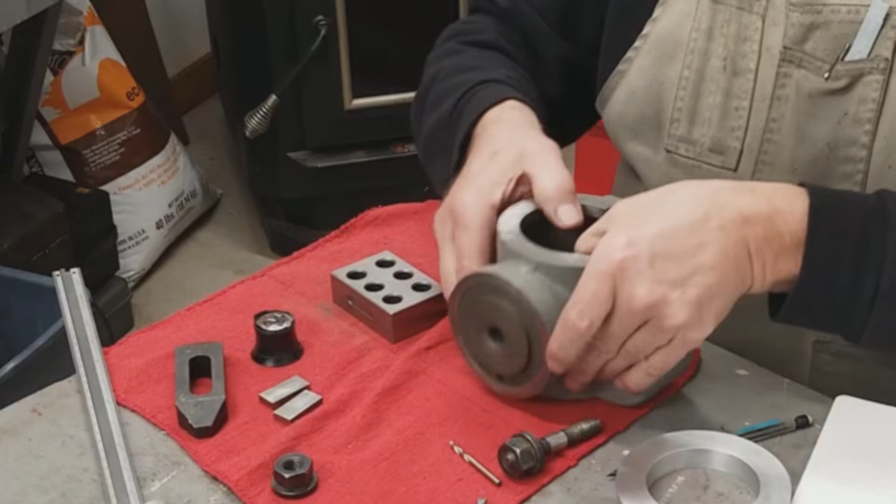The only way I can do that is bolt that on. But this surface here is raised, and I really don't know if this is square with anything. What I'm going to have to do is put a couple of risers, little shims on here to bring the 1,2,3 block out and away from this raised area.

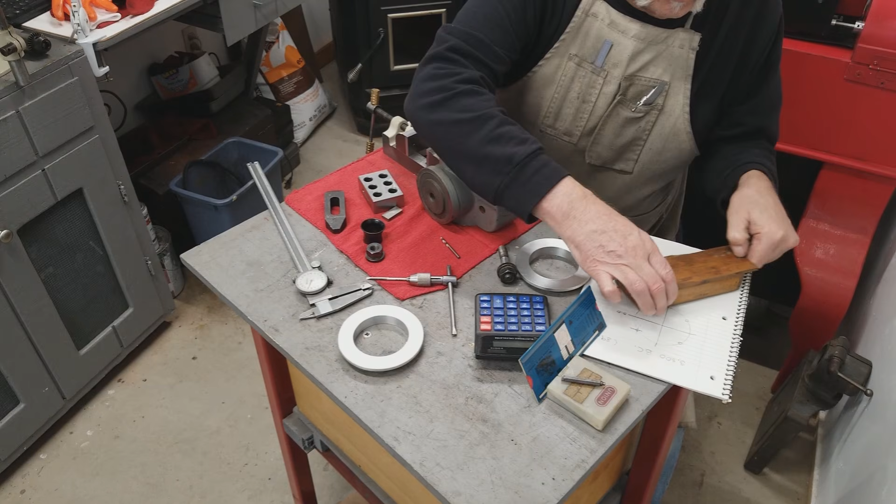The risers, let's measure them. This one is 233, 4/10. This one is 233, 4/10. Okay, so they're precise.

I'm going to place this in here. I just want to hold it. And I'm going to place these risers on the table bearing surface. Put this bolt through here. Actually, I'm going to go the other way. Now place this on here. And they're just sitting on the little riser blocks. I don't need it very tight. It's on there. These blocks aren't moving.

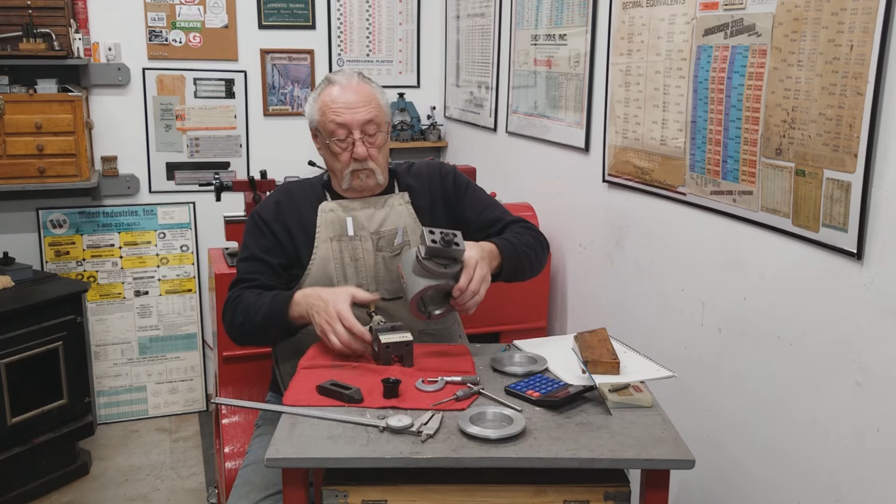What I want to do is, I think I said it already, I want 4 holes in here, that's 45 degrees from this surface. Here, here, here, here. I want to put this into the mill and drill and tap my holes.

Then I'm going to take these sleeves that go in here and transfer the positions through here, some transfer spots that I could pick up with a small drill and then eventually get to the size I need to.

I'm drilling these holes all the way through, but I can't get a transfer punch in there. So I'm going to use some transfer screws. After I drill and tap these, screw them in there, lower this onto here, and tap it down. All 4 screws should put the positions on here where I could pick them up.

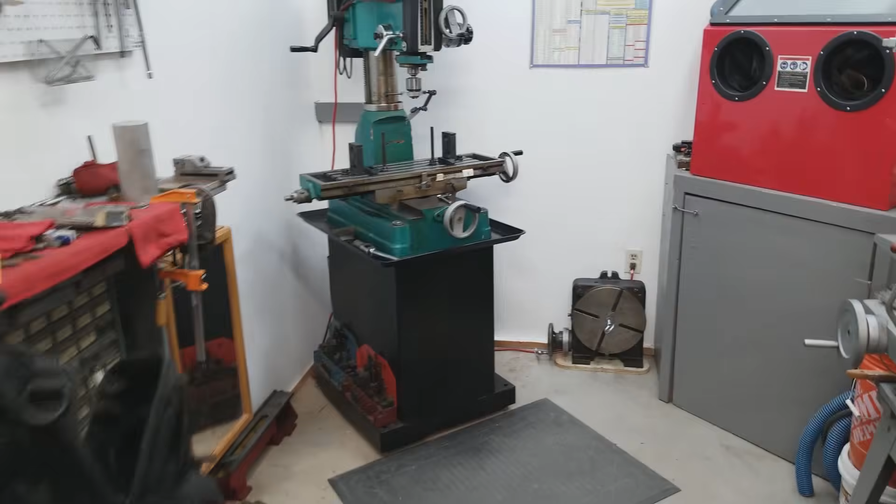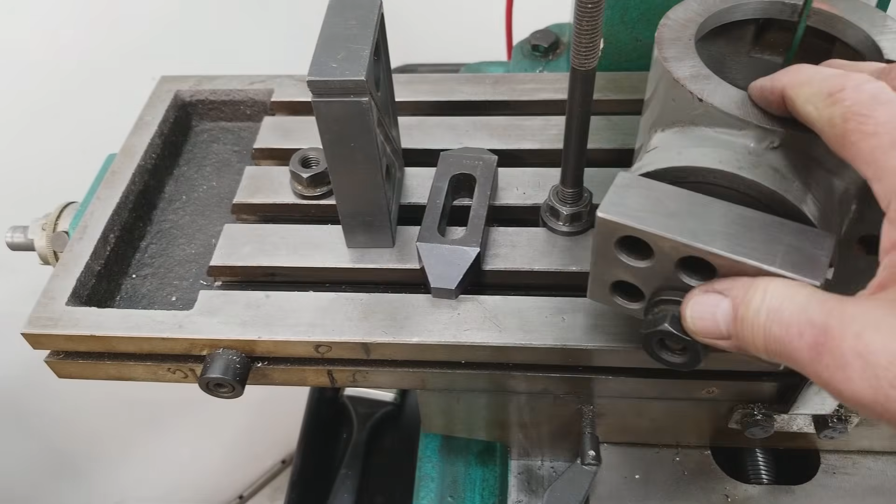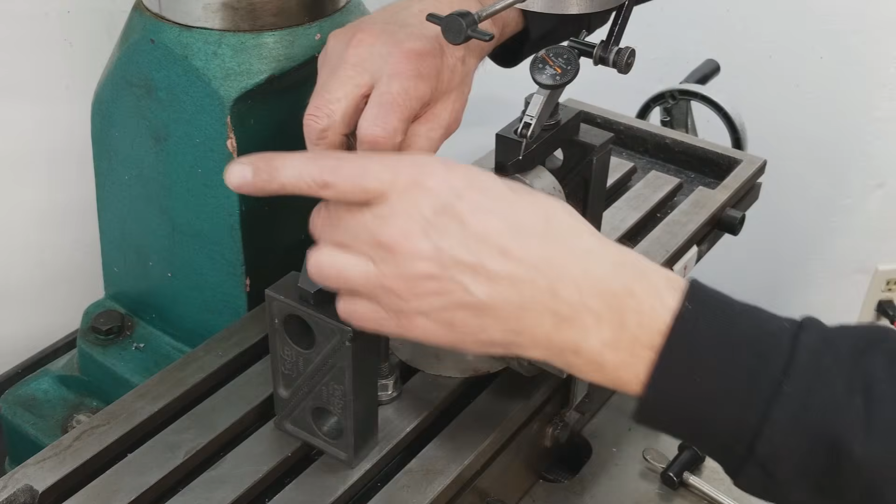I have the mill partially set up. I have my blocks all picked out, my clamps, and I have a place that I want to put this. After I indicate this in, the next thing is to lock this down. I don't need to clamp it real tight, just tight enough so when I'm drilling those little 10-32 holes, they're a number 21 drill, 159 thousandths.

Then I move off and indicate this in. After it's clamped straight with the ways, after indicating this block, I keep saying that, but it's very important that I indicate this in, lock it down, and then indicate that diameter. I'm not too sure how round this thing is, but I'll average it out so it is as equal as it has to be to work.

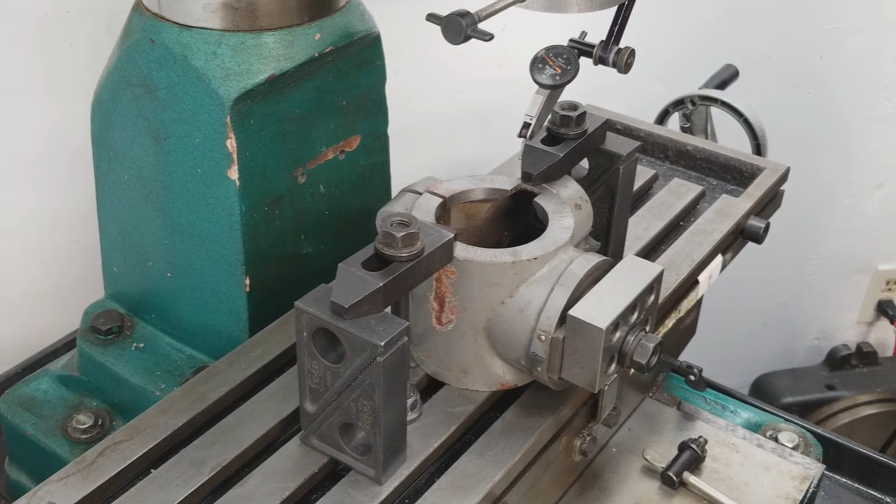What I need to do next is figure out where them holes are going to be. I decided from measuring things up, just with a scale and some calipers, that I want the holes to be on a 3.5-inch bolt circle, that's about an 89 millimeter bolt circle. Just 4 holes. It's easy enough to do the trig using 45 degrees to figure out where all those holes go. I just need to do one trig problem and all the other holes will be the same.

I move up so far, I move over so far. All the holes will be the same.

Movements will be the same, but instead of doing the trig, being an old guy—when I was young, just about every company had some kind of slide calculator. I became a machinist, started machining in the late 60s.

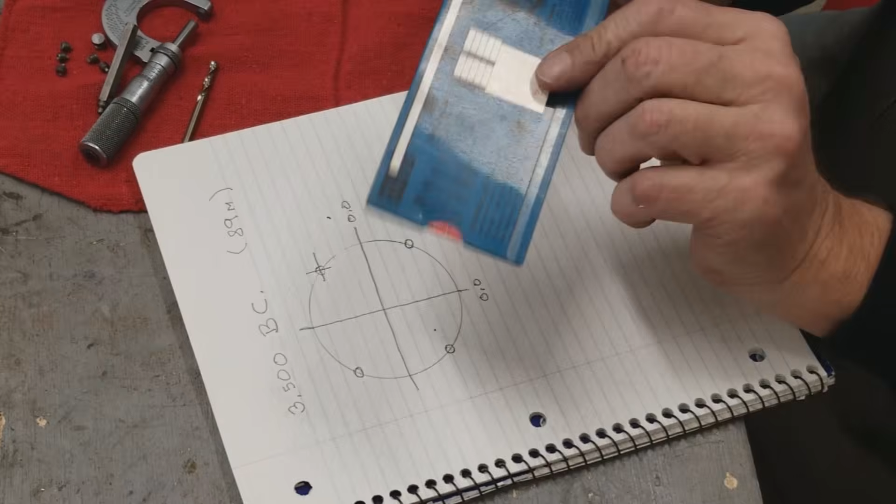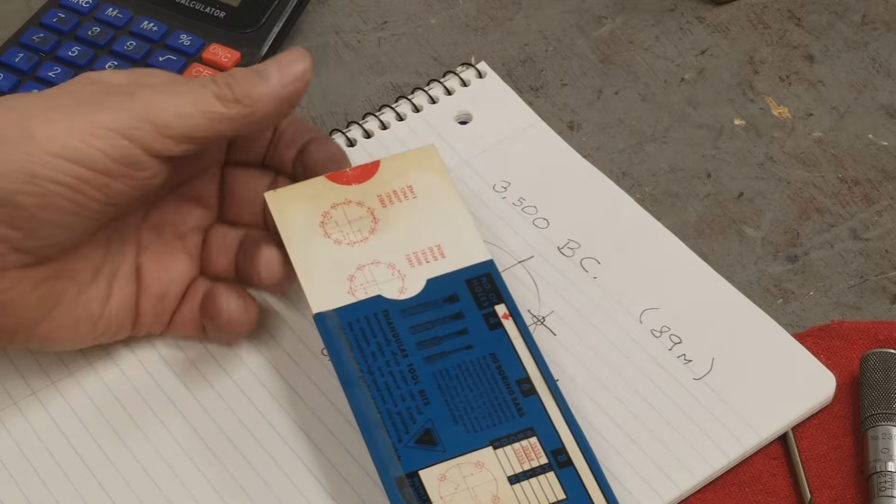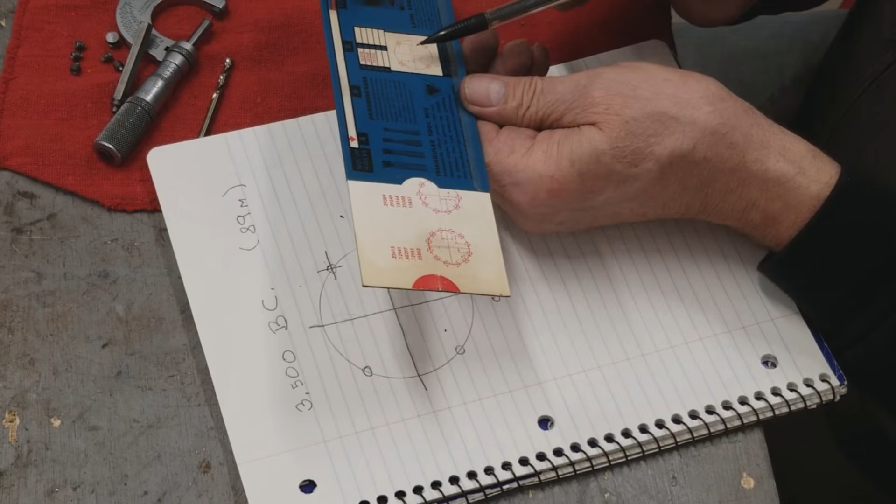I got this slide calculator for bolt circles. This side is for odd number holes: 3, 5, 7, 9, 11. This side is for 4, 6, 8, 10, and 12. Depending on how many holes you want, you bring the slide calculator over—I brought it to 4, and it shows a little picture of 4 holes on a bolt circle, lettered A, B, and C. We need the dimension for A and C, which are the same because we're working on a 45 degree.

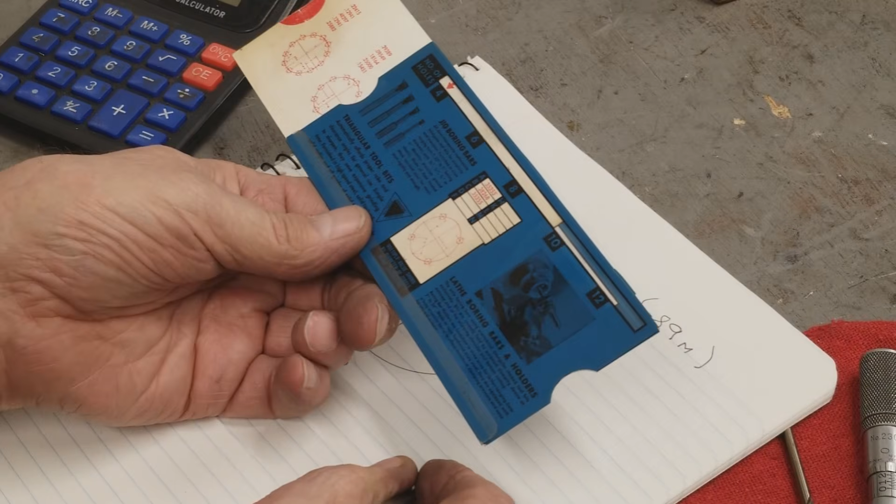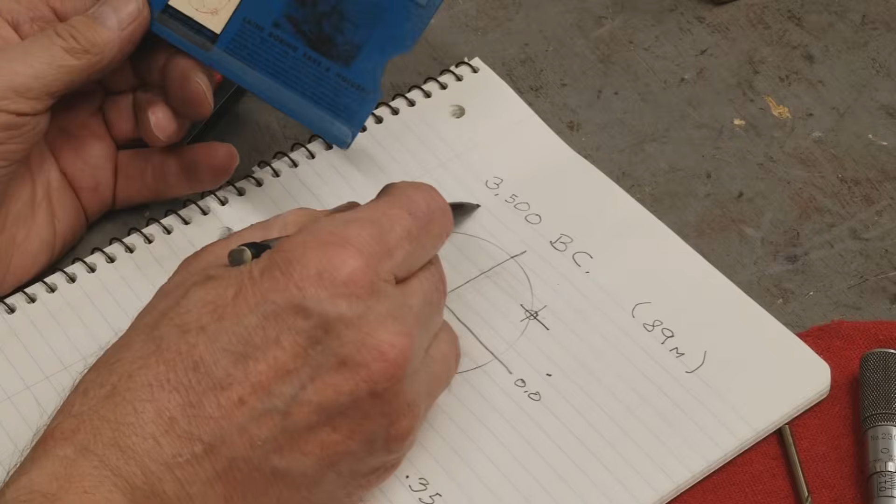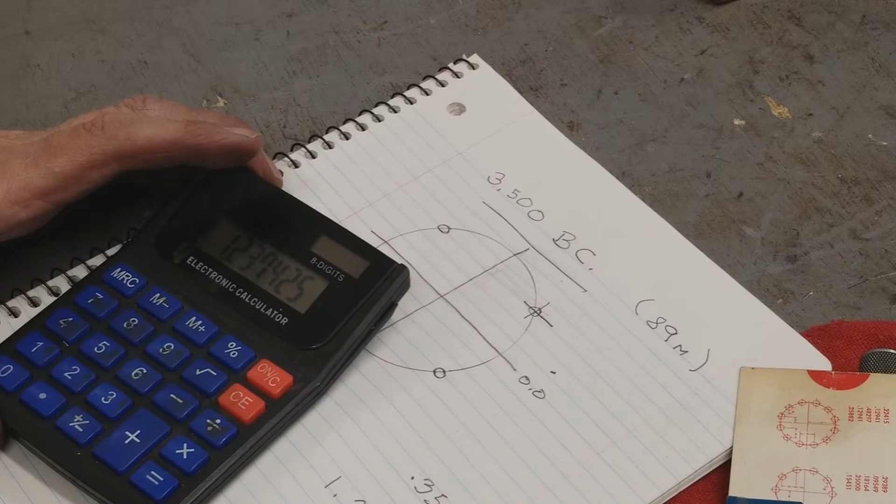That number is 0.35355. What it says here is to multiply that value by the bolt circle you're going to use, which is a 3.5-inch bolt circle. Let's do that: 3.5 times 0.35355 equals 1.2374. I'm going to bring it up to 237.5. Okay, that was easy enough.

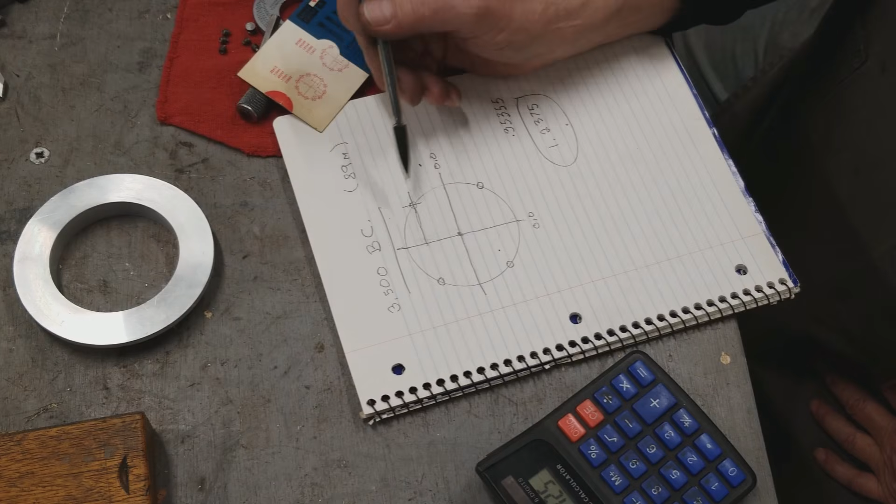In the mill, I'll be right there on 0, 0. I'll move up 1.237—I don't think that mill can do half thousandths, but I can try. Then I'll move over off the center line again, 1.2375. That's where I put my hole. Then I'll move back to 0, and the other way, 1.2375, and I'll use that same number for all 4 holes.

I mentioned that in the 40s, 50s, 60s, a lot of manufacturers made little slide rule things. I have some on the wall—let's go over there and look at them.

Right below my sticker board is the slide rules here. There's one from Kearney and Trecker, which is really old. See how close I can get—there, Kearney and Trecker, Milwaukee. This is a chip volume speed and feeds calculator. There's the how-to-use booklet right there that comes with it. I even got the envelope it came in.

And then there's this one, and I've got another one down here, speeds and feeds for milling. And then here's another time computer, how long it's going to take to machine something if you follow their instructions. I think those things are cool.

While I was showing you this stuff, I started thinking about those hole transfer screws and doing this all twice—kind of putting the holes in the casting and then picking up the holes and drilling them through. I'm going to put those sleeves right on the casting, clamp those, and just drill through all of them into the casting. All of them will be finished—well, not finished, I'll have to open those holes up a little bit.

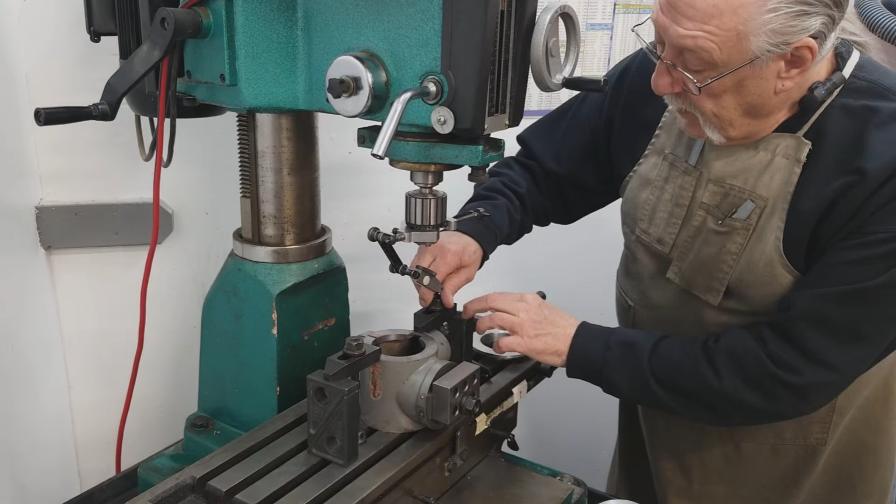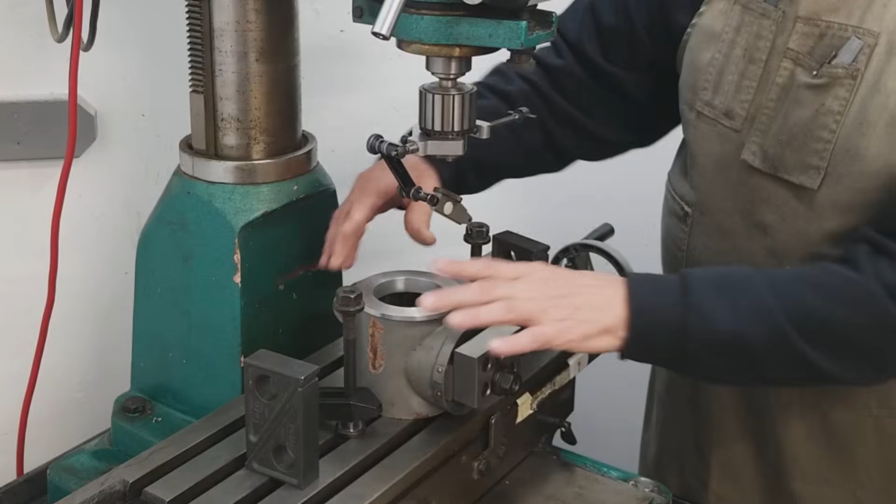But now let's go over to the mill and I'll show you what I mean. So I need to really put these clamps on. All right, I'm going to have to adjust these. I think this is a little bit easier—instead of having to do it twice, I'm just going to make it finger tight until I adjust this.

I'm sure everybody knows that the heel goes a little bit higher than the part you're trying to grab, so it pushes down on that part. I've seen people try to clamp it, and all you're doing is pushing your part away when you try to tighten it that way. Always make the heel higher than the part you're trying to clamp.

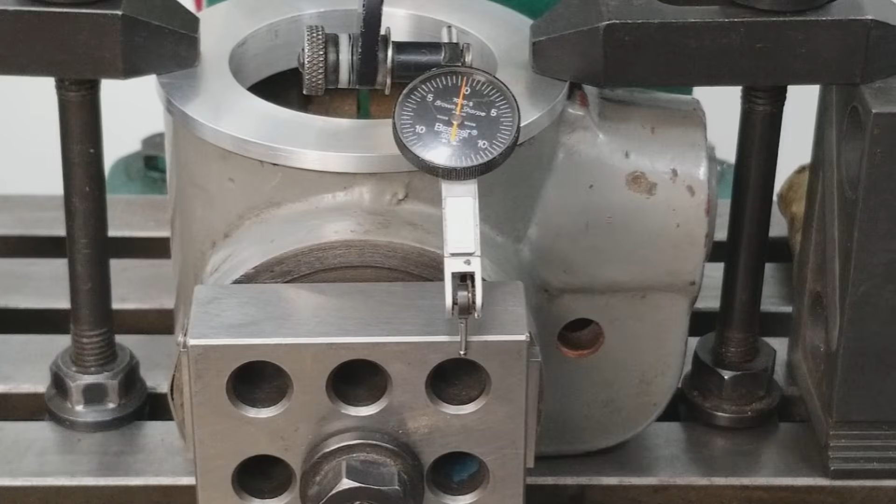Let's see—okay, it's on 0, or pretty close to it. I'm going to take my rawhide hammer and just—I like to return it to, take it off 0 and bring it back. It's going away. That's not too bad. I think that's kind of good enough.

A lot of times when you're tightening, trying to tighten it in place, it moves, so I might have to readjust it. Bring the indicator up to 0, let's see what happens. That's pretty good, in about 2 inches to 3 inches—let's see, the whole 3-inch block. If it moved a couple of tenths, I'll be surprised.

Okay, I'm going to reset this indicator so that I can indicate the ID here. I have the indicator just above the part. I'm going to eyeball where center is, and then I'll lower it into my part. It's about a quarter inch away.

All right, I'm ready to drill. I have my 21 drill in there, which is 159 thousandths, and my RPMs are set at 1100 RPMs. I'm not going to use a center drill. This is a split point, and for what it is, it'll be just fine.

Okay, I'm on my centers. I'm going to move off, what did I say? 1.2375. I'll move off to a 1.237. This thing isn't going to work in tenths. Okay, it's 100 thousandths per revolution. 1, 2.

It looks like it's right in the middle. It's where it's supposed to be. Okay, I'm going to drill all the way through. Let's do this.

I need to turn this over and do the exact same thing. Let's get this out of here, if I can find my wrench.

Side B. It's all zeroed in within a half thousandth, doesn't really matter, a couple of thousandths. I'm going to open up the holes I drilled on the sleeves, probably 5-10 thousandths. I'm going to probably use button head screws. There'll be a little bit of room to move it around, although I don't think they're going to move. That's a nice snug fit. Wherever I drill those holes, they're going to be fine. All right, let's get that drill in there and finish this.

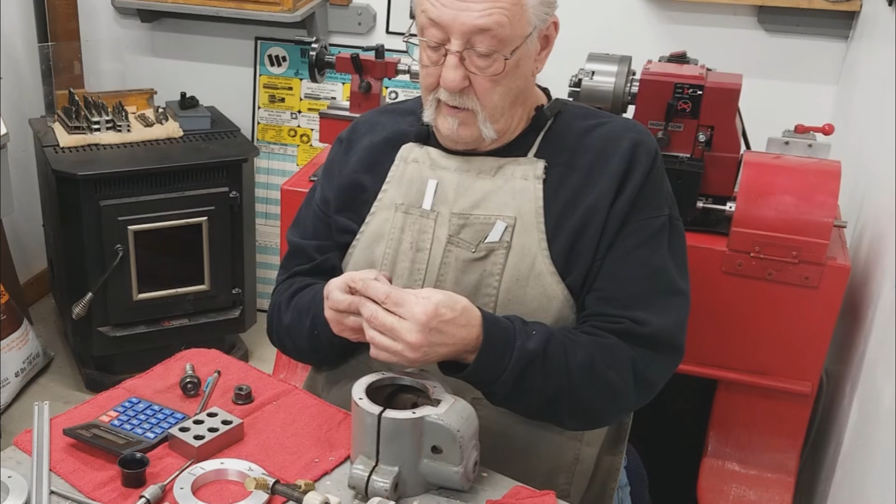Got a single flute. See what angle is this? Really doesn't matter either. This is 90 degrees, which is proper.

Now, if I had some oil, I'd tap these. All right.

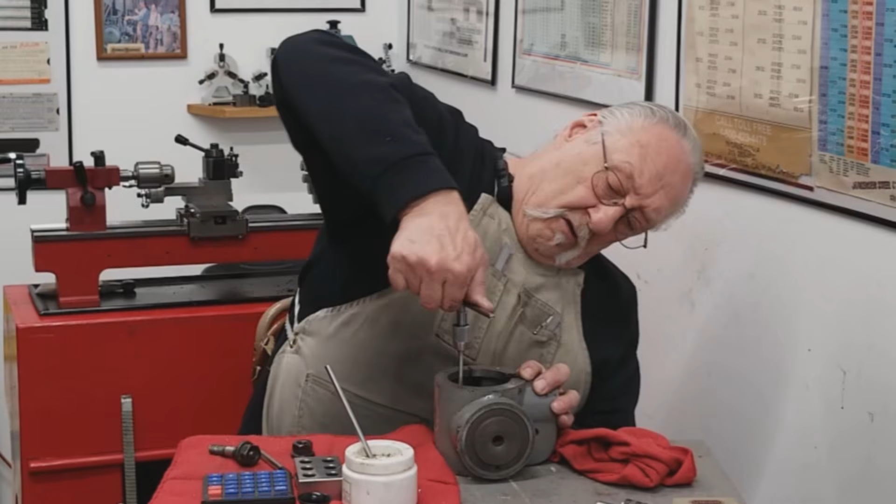I don't care how many holes you tap by hand or with any method, the one thing that goes through your mind is, am I going to break it this time? I've had to remove a lot of broken taps in my time. Not only taps that I broke, but I've had parts come in from different customers going, could you help? This is a $15,000 part, and my employee decided to clean out the hole with a tap and broke it.

I've also had parts. I used to run an EDM, well, not only the machine, but the whole department. But we had what was called a hole popper. When you're threading a wire EDM, the wire is anywhere from 4 thousandths to 20 thousandths. We used to use 10 thousandths diameter wire, and wire EDM could cut through super hard, high Rockwell parts, 65 Rockwell, which is rock hard.

And somebody forgot to thread the part before they heat treated it, and then tried to thread it.

The hole popper was used to put holes in hardened steel, and it also worked good for getting broken taps out of steel parts, aluminum parts, any kind of metal part that conducted electricity. It was amazing. You have a little tube, 10 thousandths in diameter, with a hole through it where dielectric fluid would pass through, like a coolant. It would flush chips as the electrode, the little wire, would move up and down and spin at the same time, and it would burn the broken taps right out.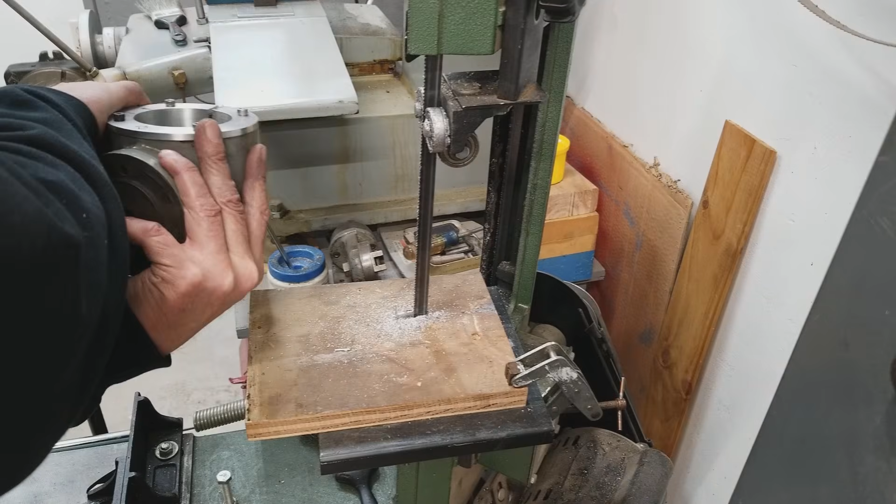That worked pretty good, just need to clean it up with a file. That slot was a little bit more than 2 blade thicknesses, so I was able to cut on both sides and open it up to the split that was in here. I need to hit it with a file on the inside, and then we'll put it onto the column and see if I could lock this in place. Let's do that.

I really only need to hit the inside. I'm going to take this off again, of course, and clean everything up. After I found the bolts for it, the 10-32s, I tried to put them in there and they were way too snug. I had to open those holes up to a number 11 drill - it's 190 something, I'm not sure, I can't remember. Getting old.

I can also, it looks like, cut that gear rack space out. I'm not ready to do that right now, I have to look at things - not sure what. Let's get over to the column and see how this fits.

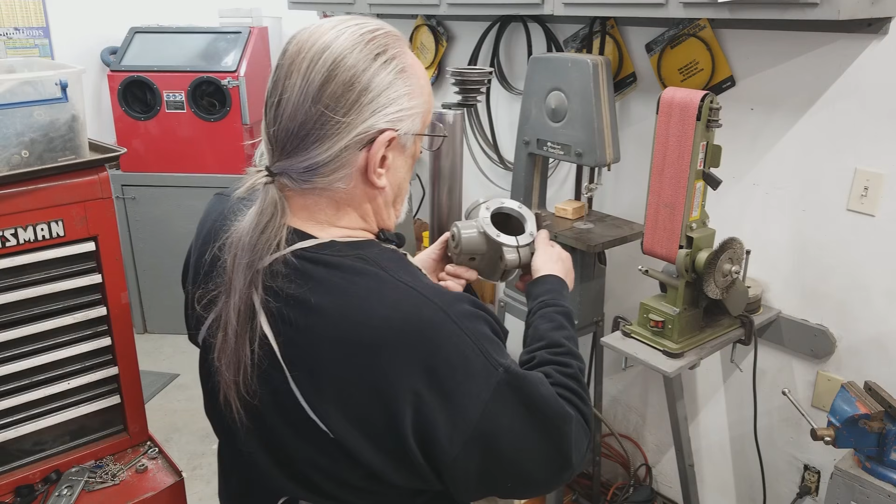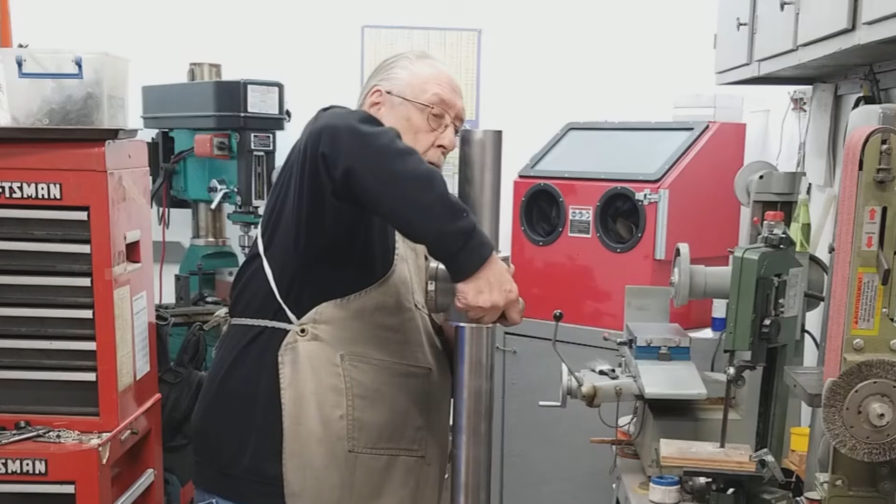I believe this is the way it goes on. I don't know if it really matters. But I know when I made these sleeves, it was hard to get past here. I had filed that down a little bit. It ain't moving.

I know a lot of people ask me if that was aluminum or steel sleeves. It's not like it's going to run up and down constantly - you put it in one place and it's probably going to stay there for 6 months. I like it.

I have to get different screws, that's just what I had around here - a few stainless socket head cap screws. I want to get some button heads. All right, I think that worked.

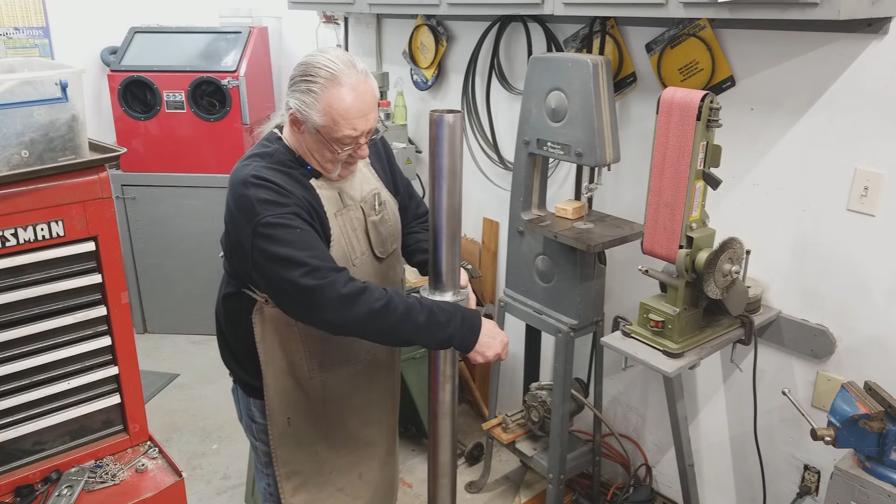Let's go back to the table. I think that was a good day's work. I still have to clean this up, buff it up, the lock handle. I need to wire brush this whole thing and paint it. But that worked out pretty good. I think that was a good day's work. Satisfying when things work out. I like it. All right.